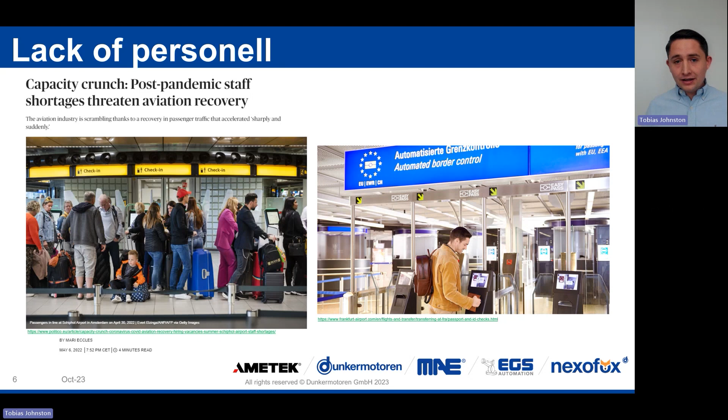So in total, we see surely a continuous growth for the topic of entrance solutions, which is good for us as Dunkermotoren, but hopefully also for you, the attendees of companies where you build such entrance solutions. But it's not only about the demands which increase—we surely see that safety standards increase as well, and that's the reason why we are here together.

We may already have heard that the EN 17352 has shortly been announced last year. It's a norm covering, let's say, power-operated pedestrian entrance control equipment, or how we know it, the turnstiles, swing lanes, or retractable lanes. The norm in general is about safety aspects, and we will dig in deeper in a few minutes.

But first, please let me give you a short overview of Dunkermotoren and the organization before we move forward. So I'm here responsible for Dunkermotoren and working for Dunkermotoren. But as you can see on this slide, we belong to Ametek, a big American business being responsible for $6 billion. So we're a quite big organization, which allows us to grow in the way we plan and have the product portfolio which we need to cover, for instance, solutions for such norms.

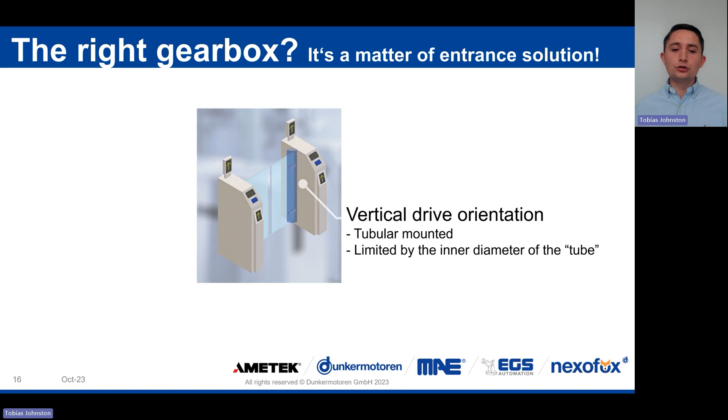Why that? If we take this access gate as an example, it's a question of how the drive is oriented. In this case, we have a vertical drive orientation, so the drive is tubular mounted and therefore limited by the inner diameter of the tube. For such cases, we have our planetary gearbox series in diameters available from 22 millimeters up to 95, so in almost every case you can find a fitting size for your application.

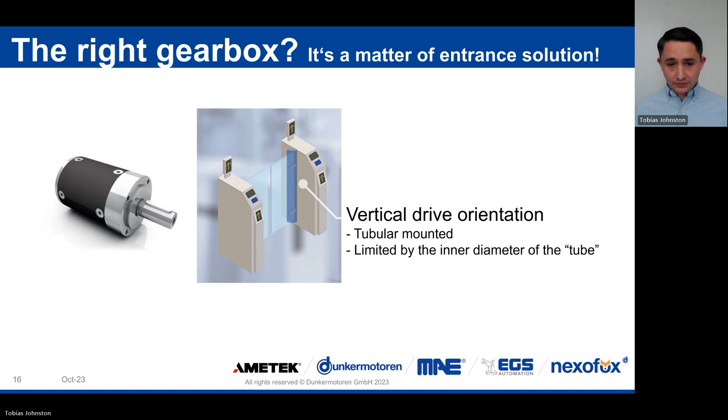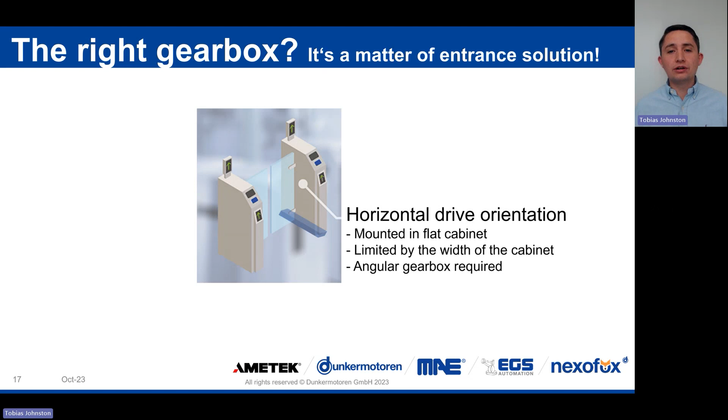Other gates rather prefer a horizontal drive orientation because they are mounting the motor drive unit in a flat cabinet, so it's limited by the width of the cabinet. For such cases, you would require an angular gearbox, and here we have different solutions: the upper one is a bevel gearbox, or we could also provide a worm gearbox. In both cases, we have a big benefit by using a zero offset gearbox.

What is zero offset? You know we have an output shaft coming from the motor entering into the gearbox, and then again an output shaft of the gearbox. What the zero offset solution ensures is that the level of the gearbox output shaft and the motor output shaft are equal - same level, no offset, and therefore no waste of space. So we have slim solutions for your applications, and this allows you to have a wonderful design.

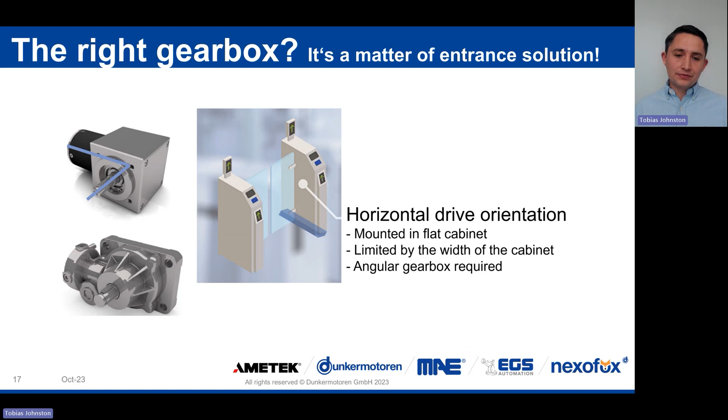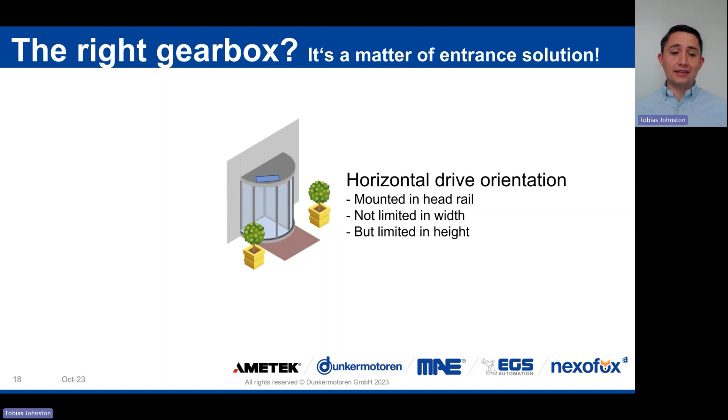In other cases, if we look at a revolving door or a safety door, we again have horizontal drive orientation, and the drives are mounted in the headrail. As you can see, we are not really limited in width, but limited in height. In such cases, we could go for a gearbox which has offset, and I hope you can now understand what is meant by offset. So width doesn't really bother us, only the height, and as we can simply turn the drive by 90 degrees, that could be a perfect match for you, and in this variant it's also saving some costs on your side.

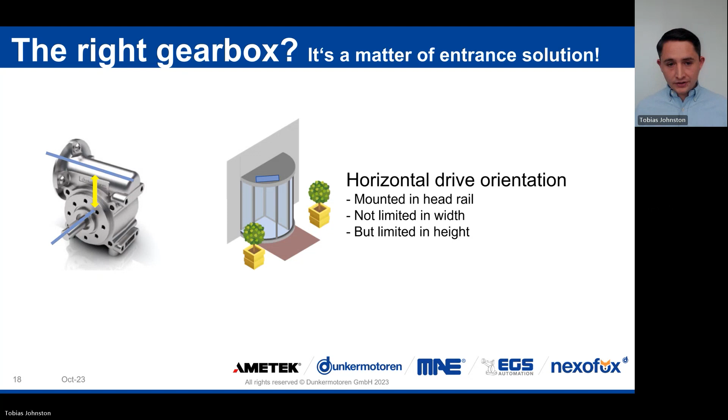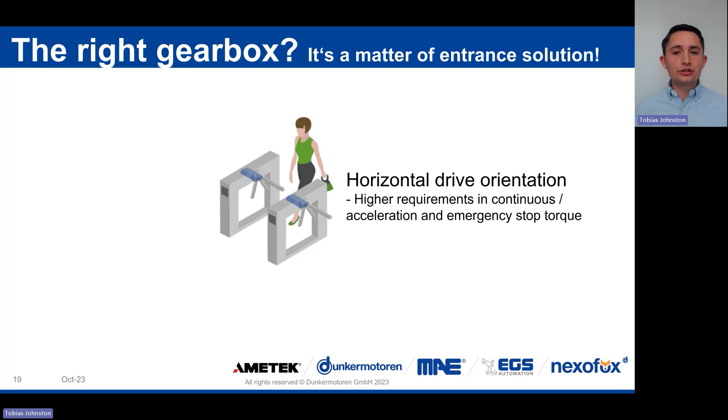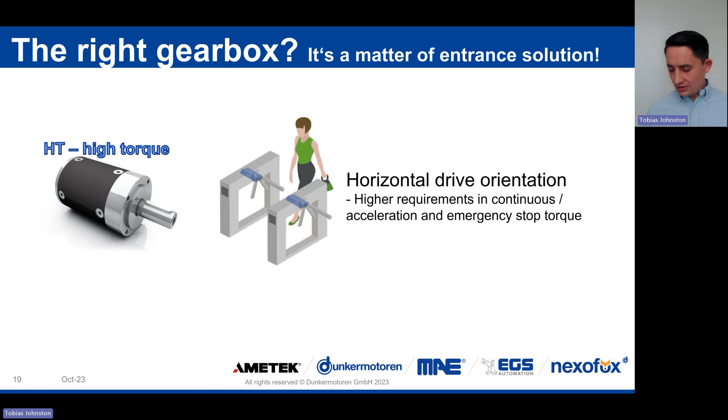If we look at another type of entrance solution, here we see a turnstile, and in most cases we have horizontal drive orientation as well. Here we have high requirements on acceleration or emergency stop torque, and for such cases we have a high torque planetary gearbox, which allows us to cover and meet all your requirements.

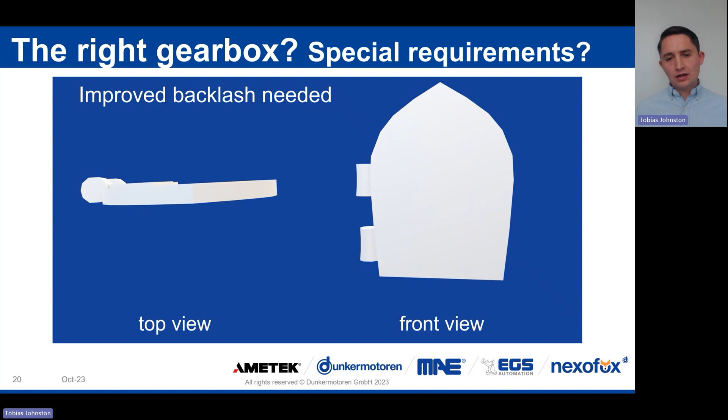Now it's getting a little more specific. What if you have special requirements? We've all touched an access gate before, where the wings do the typical 90-degree movement. When remaining in a closed position and you touch the wing, it might be that you have this wobbling effect - the gate is moving a little, and some get the impression that it could be a lack of quality, but in most cases it's actually the backlash of the mechanics.

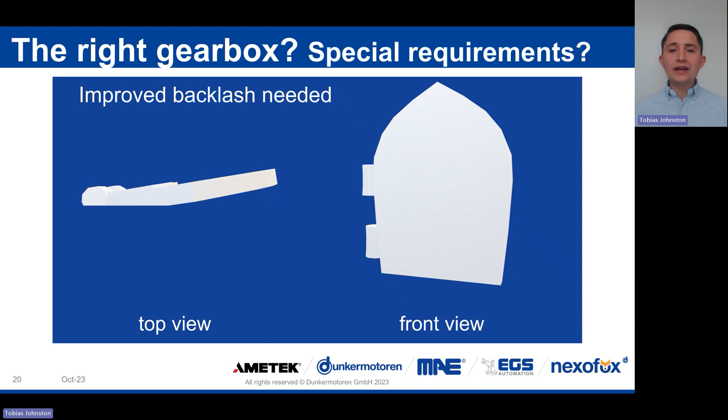One way to help improve the backlash is to simply consider improved backlash, which in most cases is only on request. We have a solution for that by considering higher precision gears in the last stage, and that should hopefully meet your requirements.

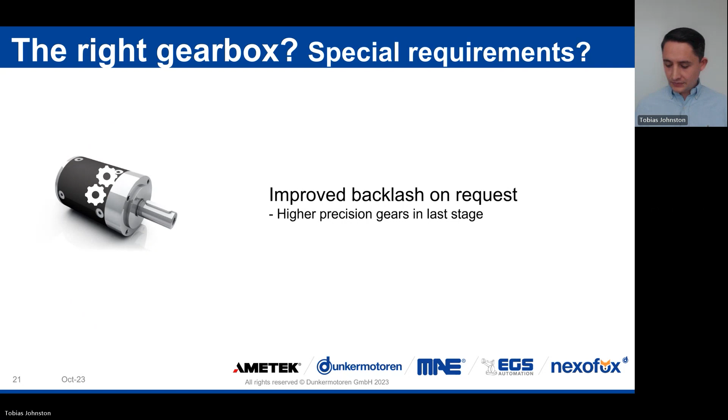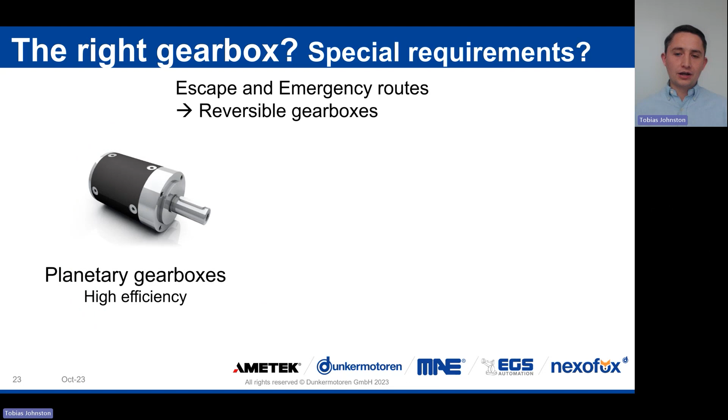Last but not least, if we talk about gearboxes, we also need to consider an escape or emergency route, because for these cases you need a reversible gearbox. Reversible simply means you are able to open the door manually, doesn't matter when powered or not powered. Just imagine you would like to leave a burning house or burning building - you need to be able to open the gates to get out. That's what our planetary gearbox offers you, because it has high efficiency.

But what most people do not know is that worm gearboxes can also be reversible.

So we have a high efficiency in low gear ratios, a lower efficiency in higher gear ratios, but we also have optimized gears for the worm gearboxes available to simply allow you having reversible worm gearboxes as well. So just keep that in mind.

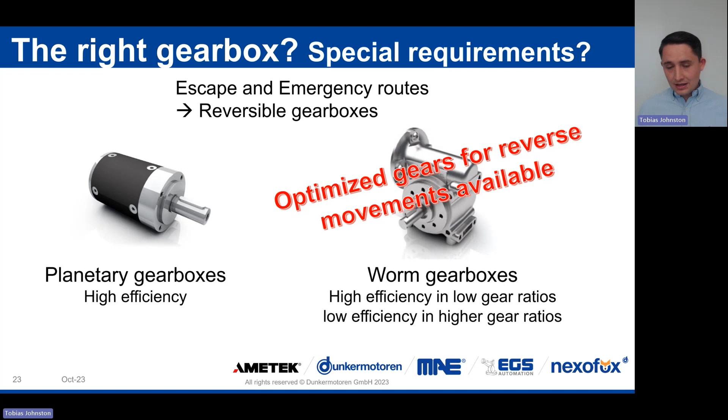And again, it's really a question of your entrance solution. So if you have a simple gate, maybe for a retail application where you don't need the highest number of lifetime cycles, a GR motor would perfectly fit. You don't have too many functionalities, and the lifetime expectation is not too high. The GR motor will cover above 1 million cycles and is a perfect match.

If we get to the more modern access gates, where you also want to have certain functionality and maybe safety, the BG series, our brushless motors, might be your perfect choice. Because we have integrated solutions for the motor control unit, but also external, and this technology really allows us to realize safety functionalities, which I will explain in detail afterwards.

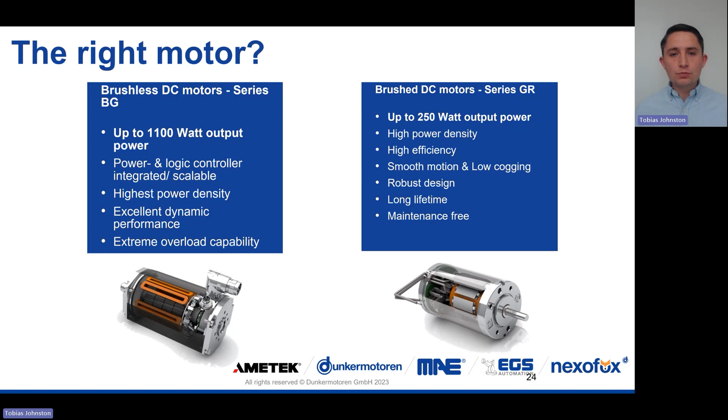So as soon as we have decided which motor shall be chosen, we can move forward to the last questions of components to be chosen, and it is about whether we need an encoder for maybe perfect movement behavior, or do we need a brake in order to make sure that the gate remains in a certain position.

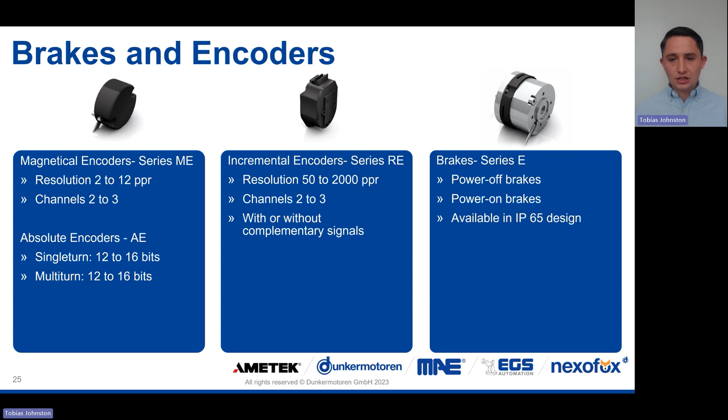we have different connectivity, either via Profinet, Ethernet IP, or EtherCAT. But from my personal experience, I can tell that CANopen is still the most common connectivity for building applications and especially for the entrance solutions.

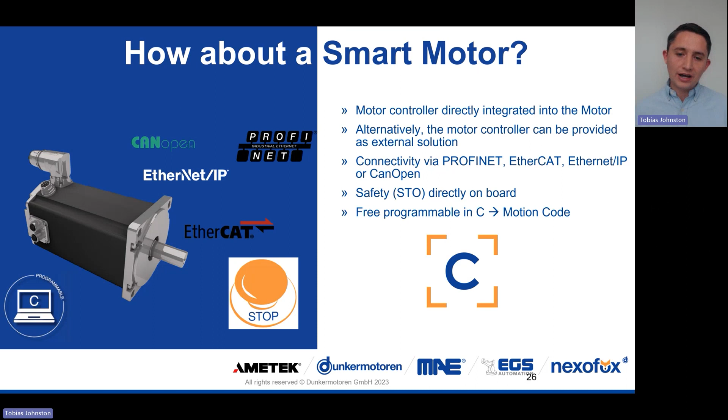In any case, not depending on external or integrated version, we can offer you safety, such as safe torque off, directly on the board, so you do not need another gadget for that. And all of our solutions are freely programmable in C. So either you can write your software, or we can help you as a development service to write a motion code, but I will explain that as well.

Okay, I told you, either choose integrated solutions or external motor controllers, but which one is the best choice for you? Well, talking about the integrated one, you have the big benefit and advantage at the end that the motor control unit is directly integrated into the motor. This means you have less wiring, and for your production, it's an easy installation.

If that is not really the must-have requirement, you can also choose an external control unit. And which are the advantages for such cases? Just imagine you have different products in your portfolio. Here we have a turnstile and a swing lane, for instance, and we know you need different motor sizes. One benefit of an external control unit could be that you can use the same motor control unit for different motor sizes. Furthermore, if you would develop functionalities on the external control unit, you could also use those functionalities for our GR series, since they have been considered in the development as well.

And last but not least, we have scenarios where we replaced a competitor's motor, and the requirement was to have a retrofit solution. Our customers wanted to make sure that if they now switch to our motor and our control unit, and continue to develop further functionalities, they could use these functionalities also for their solutions in the field. We support that philosophy by making sure that our control unit can also control the motors of our competitors. So this at the end means you have a one-platform solution for all your gates, or let's say all entrance solutions.

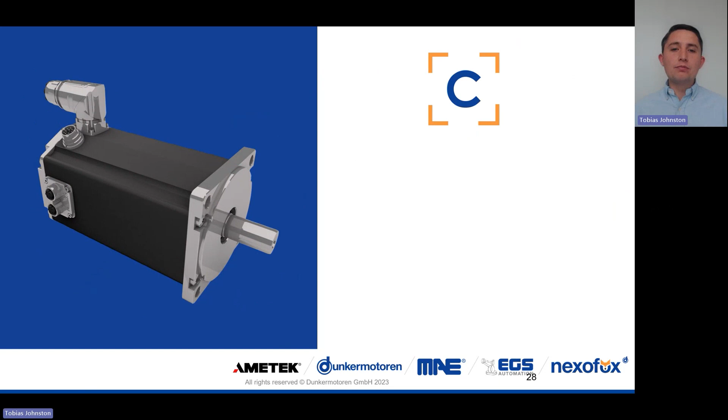I have been mentioning the motion code a couple of times. Motion code is our software which enables you to have an automatic change of behavior or configuration, meaning you can react on CAN input, on bus communication, or also on digital inputs. So you tell us how the motor should behave and we could realize that.

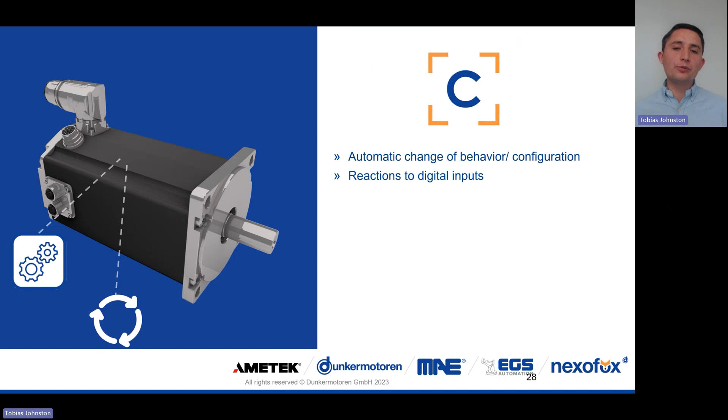This allows us to do certain diagnostics within the motor and then being able to message you to tell you this motor value has been changing, or the other value gives us a certain understanding of what is happening, which enables you to create services.

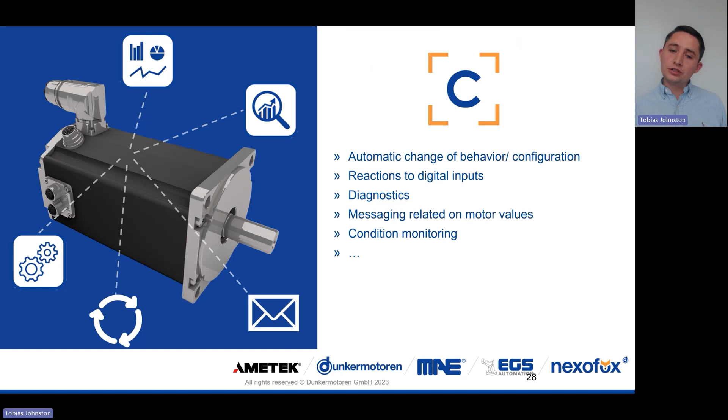Services such as condition monitoring, what we already offer today, and that is clearly a trend. You have the frequent revenues, and that's a trend on the entrance solution market we clearly see. Condition monitoring is just our starting point for services, because what could be a solution as well is offering predictive maintenance based on the condition monitoring we already have in place. Just to give you an idea about that.

So the question is, who can benefit from motion code? It's either the way that you say you have a lack of resources, or you want to participate in the experience Dunkermotoren has already gained. We simply say, keep calm and we do it for you. So you can ask us to do software development for you to make sure that the motor exactly behaves as you have requested.

The other solution, which we also support, is do it yourself. We offer you the tools, the understanding of the motors, to be able to write your own motion code. Or it could be both at the end. You order a motion code at Dunkermotoren, we offer you the open source afterwards, and you could then work on adjustments, extensions, whatsoever. So it's really a playground for both sides.

All right, now we have a drive unit, but how does that help me comply to the EN 17352? Let's dig in deeper.

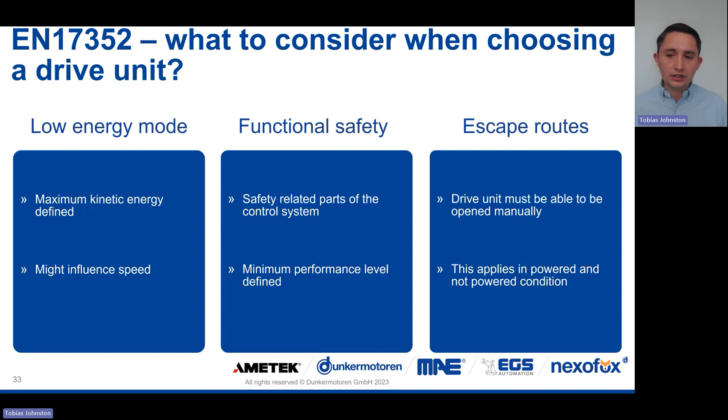So let's dig in deeper into low energy mode and afterwards functional safety. The question is, how can Dunkermotoren support me on the low energy mode?

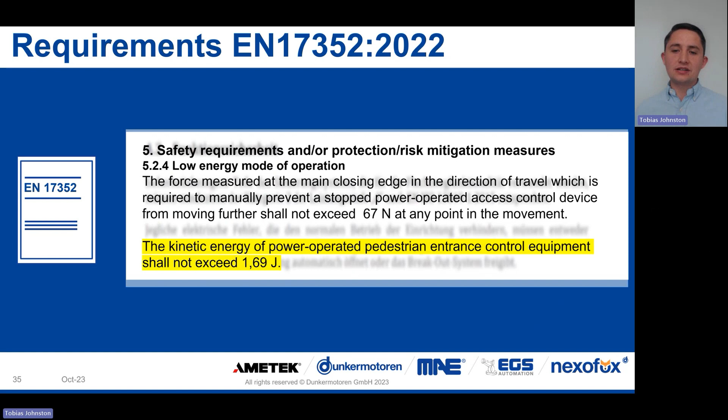As I already said, there is a maximum kinetic energy defined. I highlighted it in this slide, where you can see that the kinetic energy shall not exceed 1.69 joule. So how can Dunkermotoren now support on this topic?

In the norm, there are several products described and considered. What we believe is one of the most common is the rotating device, and you see the norm is highlighting different formulas. We just want to give you one example of how our support might really help you.

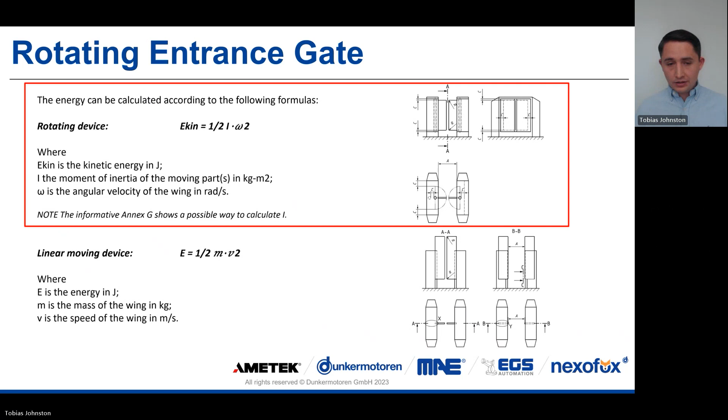So looking at the rotating device, we see that we have typically this 90-degree movement of a wing, so it's about the inertia of this wing. For this example, we simply defined there is a hub which is holding the flap.

The hub has 1 kilogram, the flap has 4 kilograms, and the formula would simply help us to come to the result that the wing has an inertia of 0.33 something kilogram square meters.

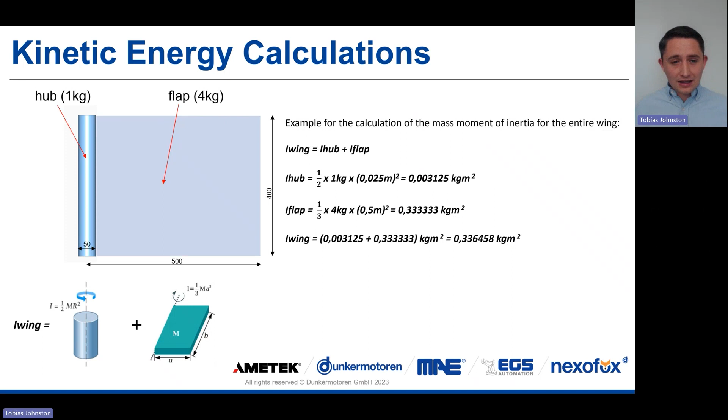So where does Dunkermotoren step in and support? That's where we clearly need to separate the formula, because the beginning of the formula is your competence, the customer's competence, because you are building the wing. But you need to consider the motor's inertia as well, and also the gearbox.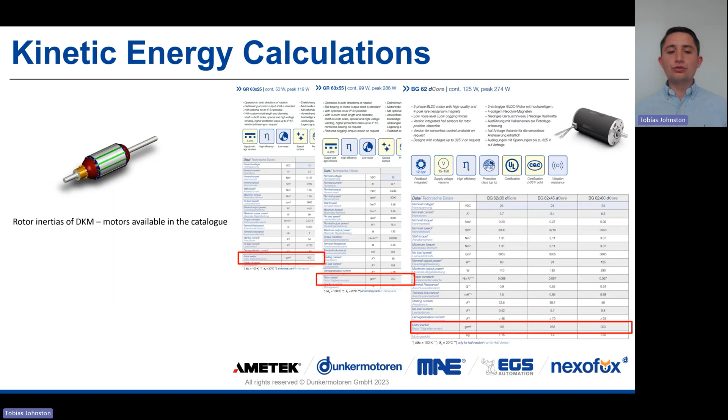We already consider the rotor's inertia in our catalog or specification, so you can simply take this value for your calculation. For the gearboxes, we also have the calculations already finalized. We have the data, just get in touch with us if you need it.

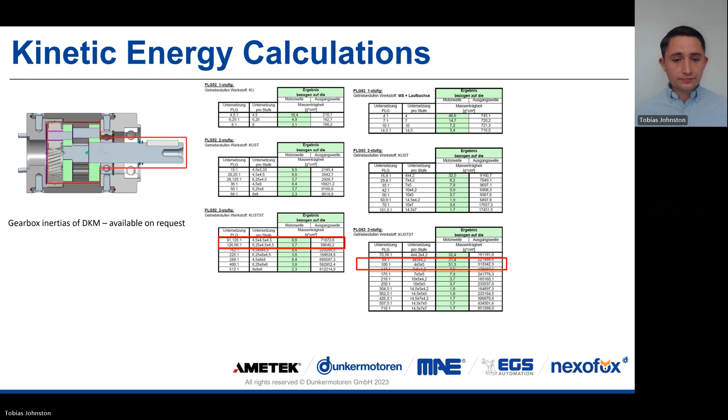So let's move forward in the formula, considering one of our drive units as an example, where we have already given the inertia of the wing. We also have the inertia of the motor, and the planetary gearbox also shows us its inertia. Looking at those three values, we see that the most impact is coming from the wing.

So if you need to adjust and improve, pay attention when choosing the wing material, either glass or polycarbonate, that really helps you meet the requirements. Considering those values, we know that 1.69 joule shall not be exceeded.

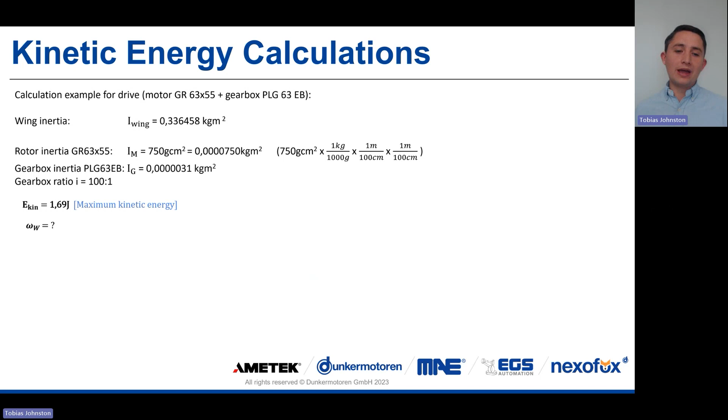So the next question is, how can we find out what is the maximum angular velocity allowed? It's simply mathematics, entering the formula, and this allows us to get to the result that there is a maximum angular velocity of 1.739 rad per second allowed, which equals 16.61 RPM.

If we now look into this kinetic energy chart, where we have the inertia and the velocity in RPM, we see that considering the inertia we calculated, we are only allowed to apply a maximum speed of 16.61 RPM.

This also means that if by physics you cannot exclude that your gate could run faster at any time, you would need to consider further safety features to ensure that in such scenarios the gate will automatically stop torque being applied. It also shows that if you want a faster moving wing, you need to reduce the inertia, maybe by changing material.

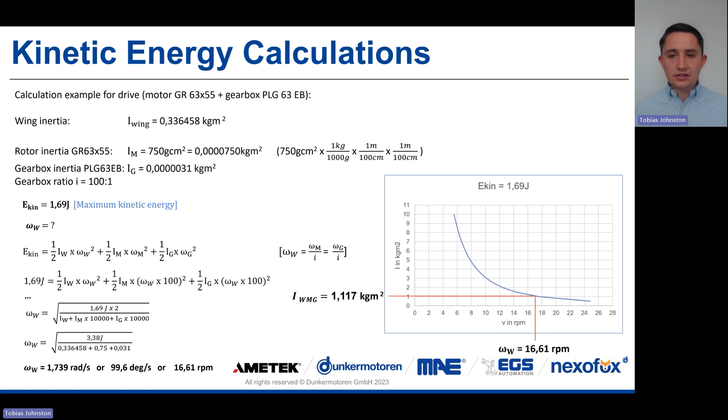Okay, so I hope this was clear to you. The next question is, how can Dunkermotoren support me in regards of functional safety? Let's come back to the norm, EN 17352.

What we see in the norm is that there is a category 2 defined and a performance level D according to another norm, EN 13849-1. And that's the point where I asked you to pay attention to the businesses we are working in, because EN 13849 is defined for the safety of machinery, which is clearly a daily topic for industrial automation. That's also one reason why we started working on safety functionalities within our products.

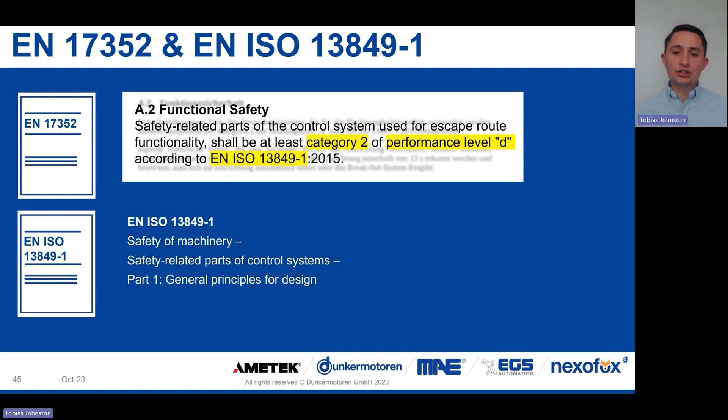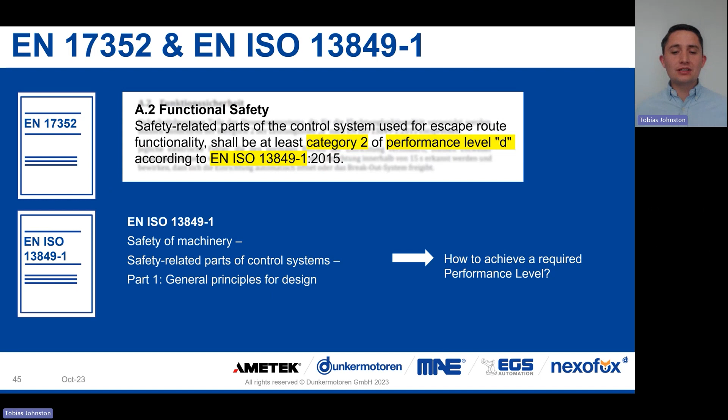So let's get to the next question, how to achieve this required performance level. The performance level is always an indicator for safety. It's at the end the ability of safety-related parts to perform a safety function, and these safety functions can be differentiated from a low A to a high value E.

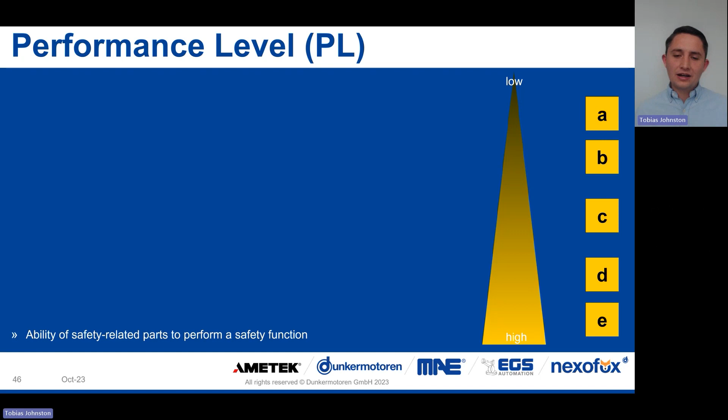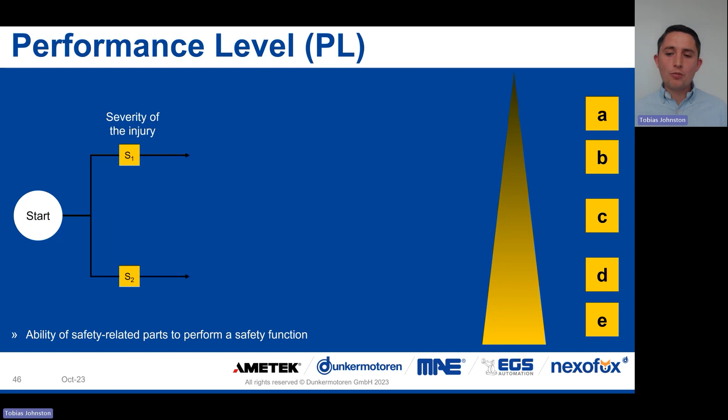How do you find out which performance level is reached? That's at the end a question of different topics. First, what is the severity of the injury, how bad are you getting hurt? The next question is, what is the frequency of exposure to danger, how long and how often are you in danger? Before answering, what is the possibility of avoiding a hazard or limiting the damage, is it possible to avoid or limit the danger? This all brings us to the result that performance level D is required within this norm.

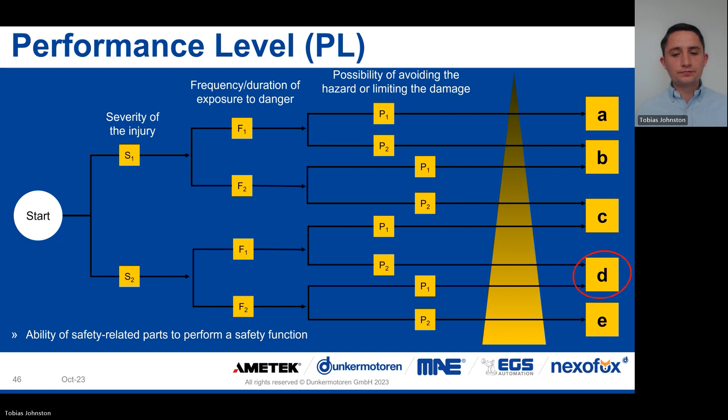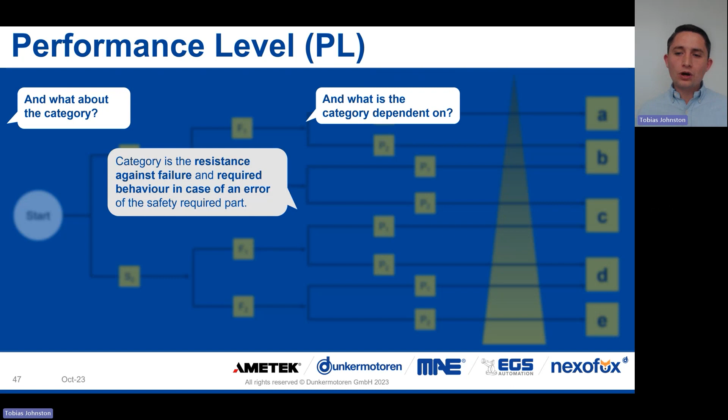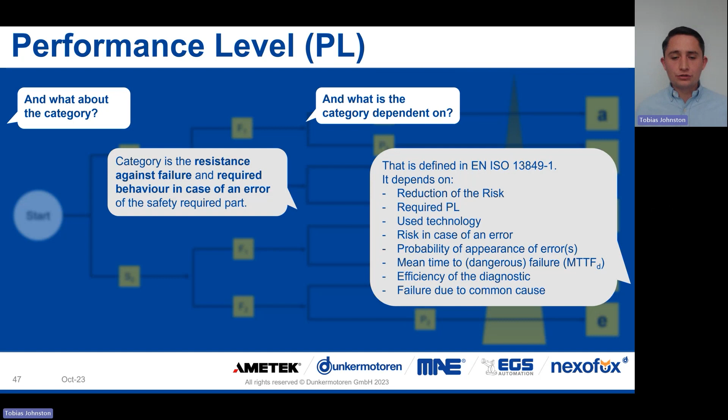Okay, so what about the category? The category is the resistance against failure and required behavior in case of an error of the safety-related part. But what does this category depend on at the end? This safety of machinery norm shows it's a question of different aspects. What we see, or are confronted with many times, is the mean time to dangerous failures, really the question of what is the mean time to a failure which could really be dangerous to a person.

And this is leading us to the answer on all these requirements, because what we at Dunkermotoren offer you is safe torque off. We always highlight STO, which is a common wording coming from the safety of machinery norm. So it is a safe stop at the end.

If we have a look at the motor, you see the output shaft is turning, and suddenly the motor or the control board gets the information from, let's say, a monitoring system that STO needs to be activated. That means the motor generates no torque anymore, so the motor simply runs out.

Just to give you an example, maybe we can compare it with a car. You see somebody in front of you, you would immediately push the clutch, and you do not add further torque, but simply you still have a moving car. And if needed, standstill can be realized with a brake.

A big benefit of the products at Dunkermotoren is that logic supply still remains, even if safe torque off is activated. That's not the case in, let's say, comparable products.

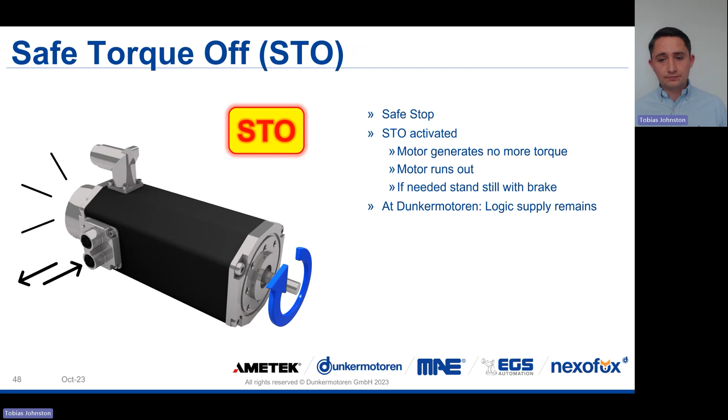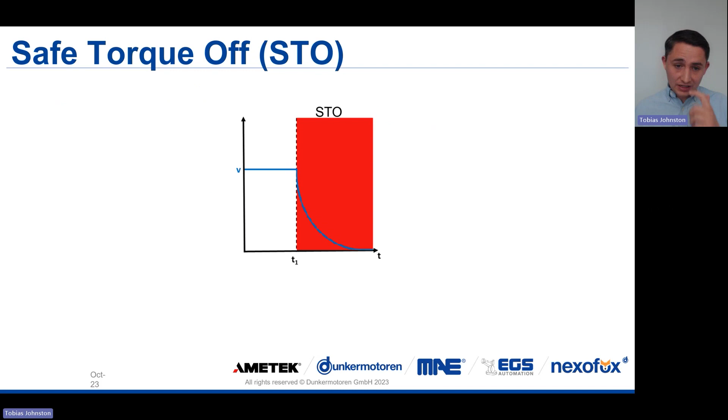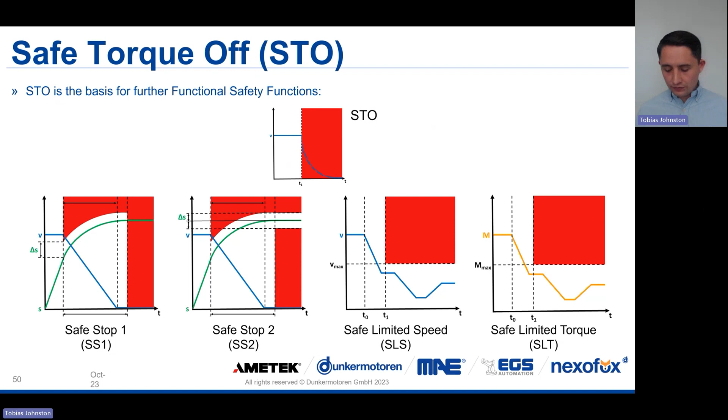So talking about safe torque off, that's really the basis for further functional safety functions. Just giving you some examples: if you want to realize safe stop, safe limited speed, or where it really becomes interesting for access gates, safe limited torque, you always need safe torque off as well. Because the features below are more about safe monitoring, but in order to enable the function, you always need safe torque off. What does STO mean at Dunkermotoren?

And we can say that our STO functionality complies with SIL 2. But wait a second, what is SIL now? If we take a deeper look, SIL simply comes from another norm. It's about the safety integrity level, rated from 1 to 4, and we comply to SIL 2.

To give you an understanding of which products offer STO, you can simply remember that the D Pro series considers safe torque off. So either for the motors with integrated control unit, or you consider our BGE, which allows it for a higher variety of motors. Currently, we are working on a solution for BG45 in the D Pro version. Based on my experience, I clearly see a big potential for this type of motor because we have a high power density in a very small motor, so it should be a perfect solution for the access gates.